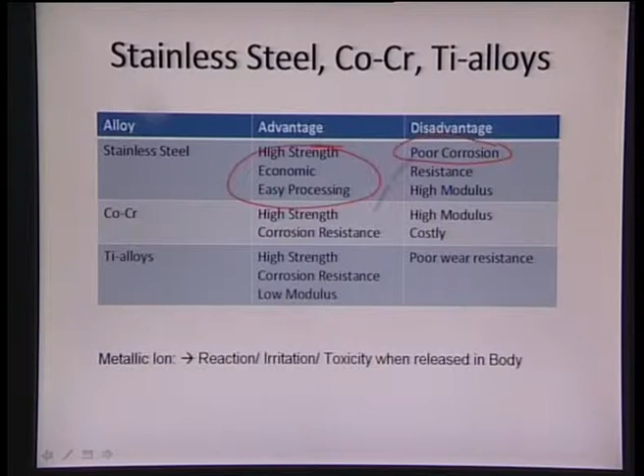As we realized earlier, stainless steel has high strength, is economic, and has easy processing, but the problem is it has very poor corrosion resistance. That's why we moved to cobalt chromium alloys, which have good strength and high corrosion resistance, but are very costly and still have high modulus. If a material has very high modulus, the bone will start thinking it doesn't need to be there, and it will start getting reabsorbed into the body.

So we want a material with a little lower modulus, and that is sufficed by titanium alloys. They provide a good combination of high strength, good corrosion resistance, and low modulus. But the only problem with titanium alloys is that they have very poor wear resistance.

To counteract the poor wear resistance, titanium alloys generally need some sort of surface coating, which takes care of the wear part and enhances the surface wear resistance of the titanium implant. We can also apply a coating that is much more biocompatible in nature, one that can assist bone integration onto its surface.

That coating can be more ceramic in nature, such as hydroxyapatite. Once the hydroxyapatite-based ceramic coating is applied onto the titanium implant, it can take care of the lower wear resistance of titanium and impart much superior wear properties. It can also provide a base for cells to grow, adhere, and proliferate on the implant surface.

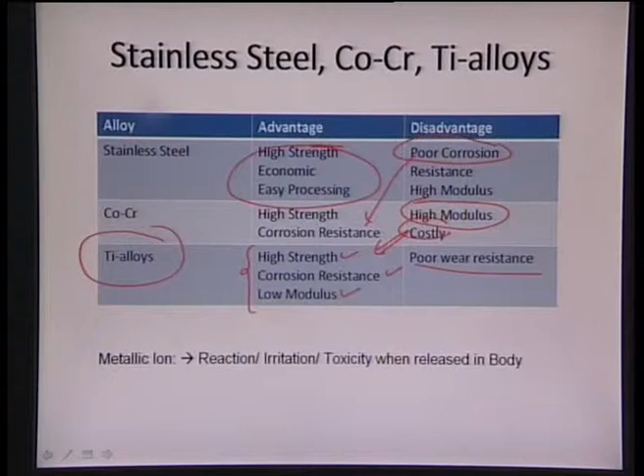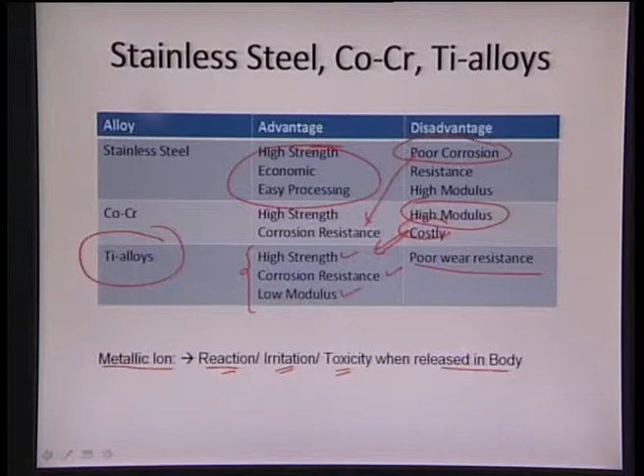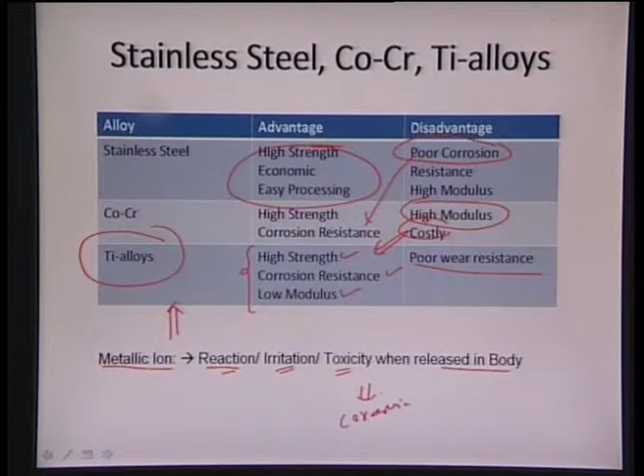There is one more problem with the titanium alloy Ti6Al4V: it has metallic ion concentration that can react, irritate, or induce toxicity when released into the body. To eliminate or reduce the effects of ion release, ceramic coatings again come for the rescue, acting as a barrier that doesn't allow ions to flow easily from the implant surface to the surrounding material.

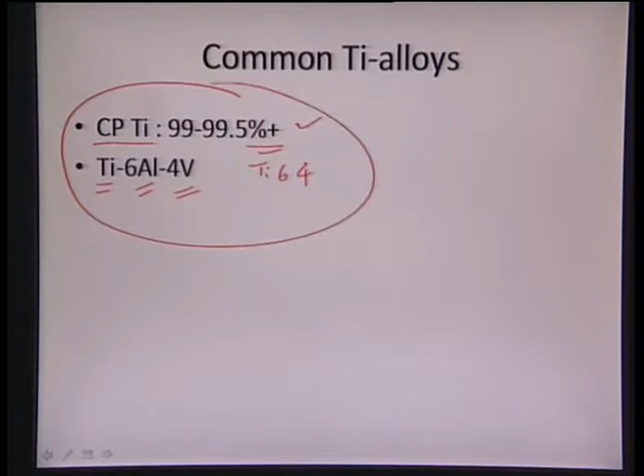There are two common titanium alloys predominant in the medical industry: commercially pure titanium, which is approximately 99% to 99.5% plus purity, widely utilized in the biomedical industry, and a combination of titanium with 6% aluminum and 4% vanadium, called Ti6Al4V, or Ti6-4 for short. These are the two most commonly used titanium alloys in the biomedical industry.

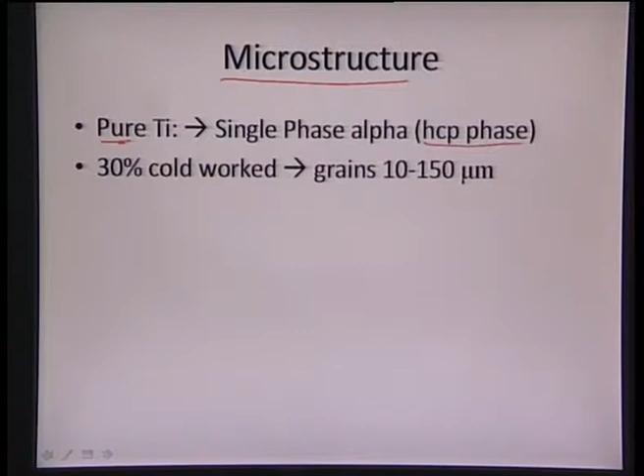Coming to the microstructure, pure titanium is basically a hexagonal HCP phase, called the alpha phase, so pure titanium appears more as a single phase material. Owing to the limited slip planes available in an HCP crystal, it has very limited processability, as it has a limited number of slip planes, making it generally difficult to process.

This titanium alloy is generally cold worked to achieve grains in the order of 10 to 150 micrometers in size. Ideally we can get a single phase structure in titanium alloy, and to induce much more strengthening, we go with cold working, approximately 30%, to achieve grains in the order of 10 to 150 micrometers in diameter.

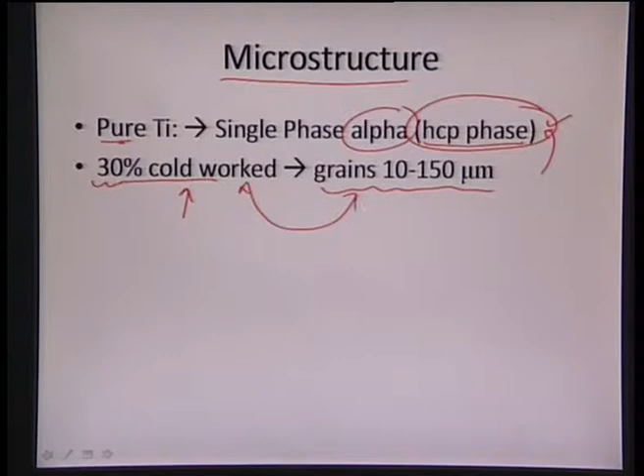There can be addition of secondary interstitials into the titanium, such as oxygen, nitrogen, or carbon, which go into the interstitial sites of titanium, giving various combinations. Certain grades differentiate the titanium alloy, from grade 1 to grade 4, depending on oxygen content. Oxygen can range from 0.1 to 0.4 weight%, nitrogen up to approximately 0.05% maximum, and carbon up to 0.08 weight% into the titanium alloy.

The function of all these interstitials is to achieve interstitial solid solution strengthening. So once carbon, oxygen, or nitrogen are in the interstitial sites, they induce solid solution strengthening of the titanium alloy.

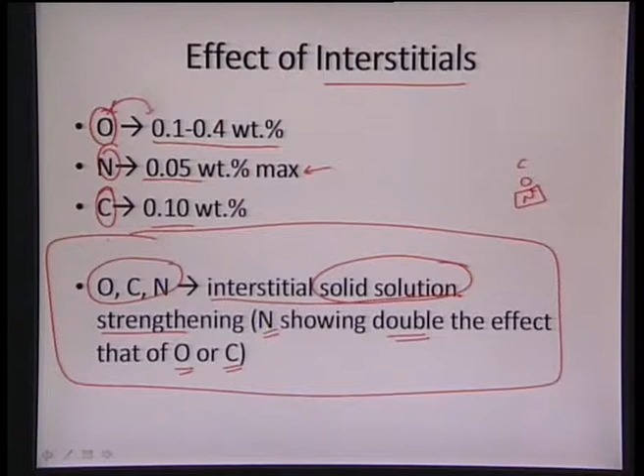Researchers have observed that nitrogen shows approximately double the effect of either oxygen or carbon. So if nitrogen sits in the interstitial, it provides much more strengthening effect compared to oxygen and carbon. But we can add a maximum nitrogen of around 0.05 weight%. This is the overall effect of interstitial oxygen, carbon and nitrogen sitting in interstitial sites, with nitrogen showing approximately double the effect of oxygen or carbon in providing interstitial solid solution strengthening.

Oxygen is also very predominant in enhancing mechanical properties. If we increase the oxygen content from 0.18 to 0.4%, the yield strength will increase dramatically from 170 to 485 MPa, approximately more than 2.5 times improvement just by doubling the oxygen content. So once we have titanium, inducing oxygen to a larger percentage will enhance the yield strength.

At the same time, if we increase the oxygen content from 0.085 to around 0.27 weight%, we will also see an increase in fatigue strength, from approximately 88 to 216. So if we increase the oxygen content to approximately double or triple, we see the same type of effect in the fatigue strength as well.

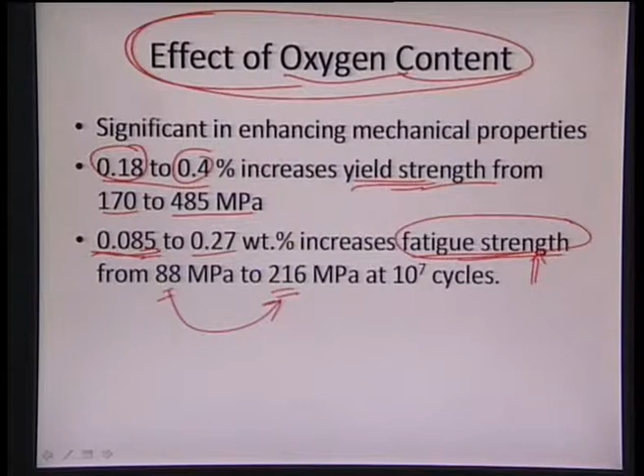So higher oxygen content is useful in terms of increasing the yield strength and also increasing the fatigue strength, because those sites act as high energy regimes, making it difficult for slip to occur, which provides an increase in the yield strength or fatigue strength of the titanium alloy.

The corrosion resistance in titanium alloy comes because of the presence of a titanium oxide layer. This titanium oxide layer acts as a barrier for the surface to interact with the titanium implant, and is responsible for rendering corrosion resistance to the titanium alloy.

At the same time, TiO2 is found to be much more biologically compatible even at the molecular or tissue level. Because of its similarity, it allows cells or tissues to grow on its surface without inducing any toxic effects, so tissues find a very friendly environment on the titanium oxide surface, because it is no more titanium.

Titanium is basically covered with an impervious layer of titanium oxide, so there is no release of titanium ions through it. Titanium oxide is much more bio-friendly and bio-inert in nature, and does not induce irritation or toxicity in cells or tissues, so they find a comfortable environment for adhesion, growth and proliferation.

So the advantage from the titanium oxide layer is that it imparts corrosion resistance even in severe body fluid environments, and it can also impart biological compatibility both at the molecular level as well as the tissue level.

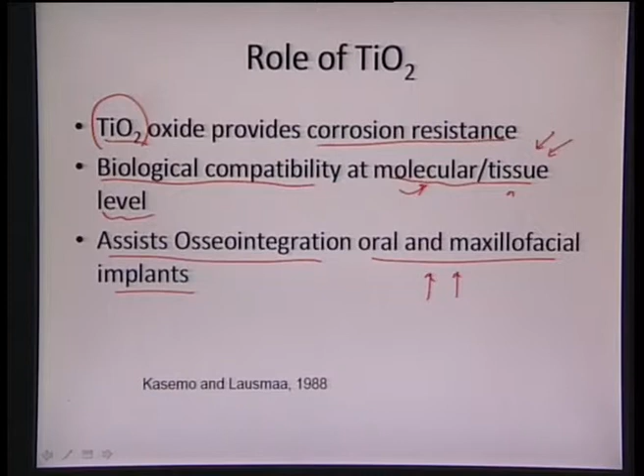Coming to titanium alloy, titanium itself is not very strong, so it needs reinforcement. Titanium is a single phase material, and if we make it dual phase instead of having only the alpha or HCP phase, by inducing a secondary phase we get strengthening from the secondary precipitate, because it impedes dislocation motion. It can also generate new slip systems available for slip to occur, enhancing ductility. So processing is enhanced, and strength is also enhanced because of the dual phase microstructure.

In the titanium alloy, we have titanium as base, generally called Titanium-6-Aluminum-4-Vanadium, with aluminum between 5.5 to 6.5% and vanadium between 3.5 to 4.5%. We also have secondary reinforcements such as iron, carbon, and oxygen, which also impart strengthening by increasing either the yield strength or the fatigue strength.

That part can also be achieved from interstitials such as carbon and oxygen, and we can also have some other reinforcements from iron, nickel and so on. Overall, this titanium alloy is also called titanium 6 aluminum 4 vanadium. It is a very popular material for biomedical implants, and it consists of aluminum around 6% and vanadium around 4%, with the rest being carbon, oxygen and so on.

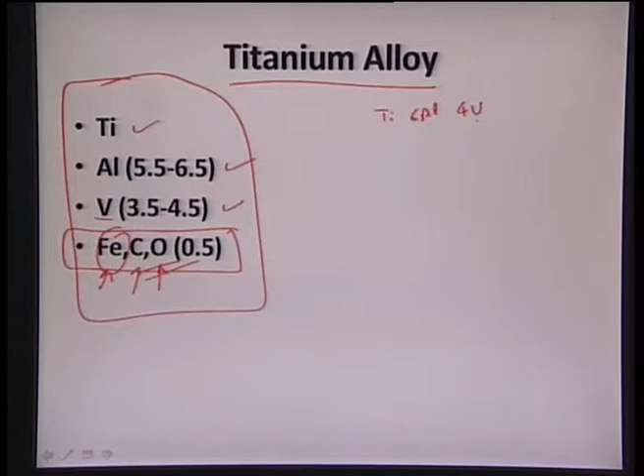As I said earlier, the role of these additions in titanium 6 aluminum 4 vanadium is that it forms a dual phase microstructure. Alpha comes basically from the titanium part, and at the same time alpha is also being stabilized by aluminum, so aluminum acts as an alpha stabilizer, rendering the HCP phase much more stable. But the presence of vanadium helps in forming a beta phase. So we see this titanium 6 aluminum 4 vanadium is a combination of alpha plus beta phase.

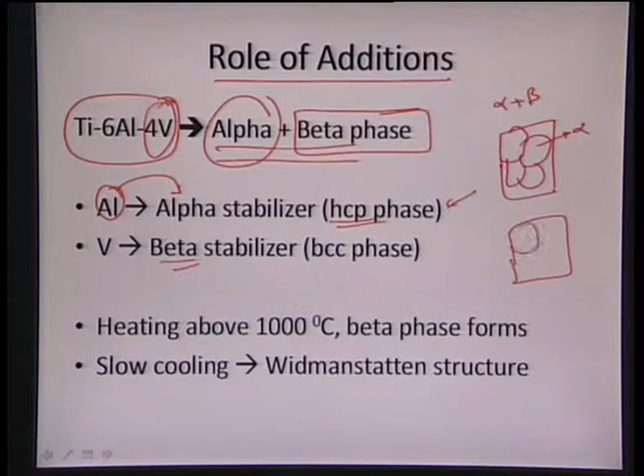Instead of having a single phase like in pure titanium, which was only alpha, in this case we have a dual microstructure. Some certain pockets are only beta, so we can see alpha plus beta regions. We see a dual phase microstructure, which assists us in achieving even higher strength and very high fatigue strength once we have this dual phase microstructure.

That is the advantage of inducing secondary alloying elements such as aluminum and vanadium, to impart much more increase in the yield strength and the fatigue strength of the titanium alloy itself.

One more thing that happens with titanium 6 aluminum 4 vanadium is that once we heat it above 1000 degrees centigrade, we see the formation of beta phase, because beta phase is stable at higher temperature. So once we go above 1000 degrees centigrade, we see a microstructure which is full of beta, 100% beta structure.

Once we start cooling it very slowly, the material is basically being retained at very high temperature for a very long time, and it cools down very slowly. So there is much more increase in the grain size. That is the problem with slower cooling, that we tend to see something called the Widmanstätten structure.

In the Widmanstätten structure, we basically have a structure like this, let me draw it here. Initially we have only beta grains once it is heated at higher temperature, greater than 1000 degrees centigrade, so we see completely 100% beta. As soon as we start cooling it down slowly, we see the grain size increase, and after a certain temperature below 1000 degrees centigrade, we see the nucleation of alpha phase as well. In this case, we see bigger beta grains which were stable above 1000 degrees centigrade, along with nucleation of alpha phase.

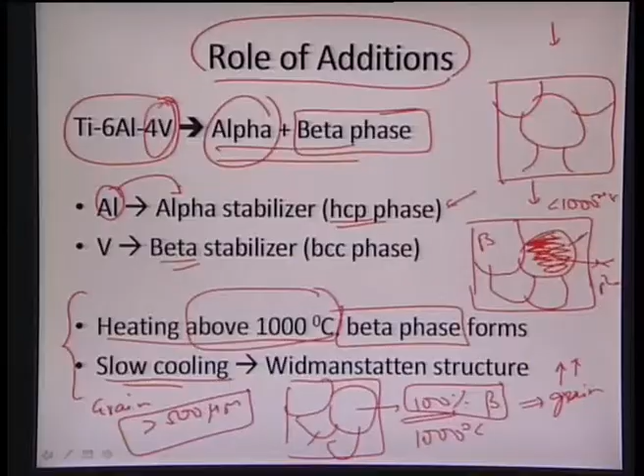So though this alloy has certain advantages from its additions, slow cooling induces some deleterious effects, and the grain sizes can basically be more than even 500 microns. At this grain size, the mechanical properties will be very inferior because of the Hall-Petch relationship, since our grain sizes are on the order of more than 500 microns.

So the overall mechanical properties, such as yield strength, will be very inferior. That is the overall negativity which can be induced just by processing itself, because in this case we are taking the material at very high temperature, more than 1000 degrees centigrade.

We are letting the beta stabilize, and then we are allowing the alpha phase to form an equilibration. We are doing a very slow cooling, and because of that the grain size has extended to a very huge extent, maybe up to more than 500 microns. This nucleation will cause the HCP phase to form, which is nothing but alpha, which is again more like a needle-like structure, and that is inducing this negative effect.

So we can see this Widmanstätten structure. It is basically the HCP alpha phase, which is aluminum rich, and when depleted in the vanadium part, it starts precipitating as a plate or needle.

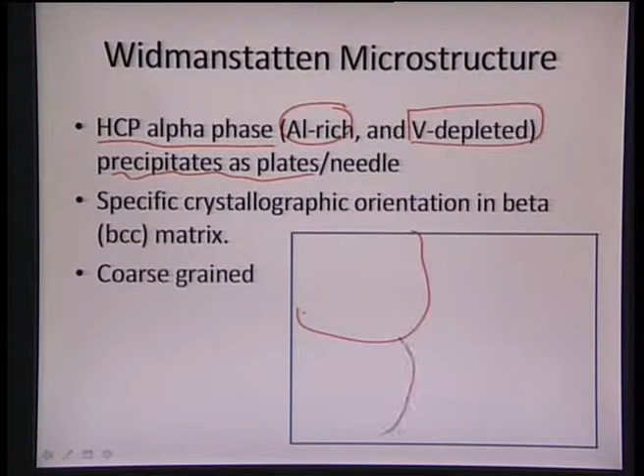So we see that we had grains like this for the beta, and then we see the nucleation of this alpha phase, which can start nucleating within this, and then we have this beta phase, and again we will see alpha phase nucleating, because alpha phase will be much more stable at less than 1000 degrees centigrade.

We will see more of the grains which are forming alpha now. So we will have much more regions which have started forming alpha, and the original beta regions which were present because we had taken the material above 1000 degrees centigrade. So this is the initial beta, and then we start seeing the formation of alpha structure, which is much more needle-like, and that induces specific crystallographic orientation in beta.

So this alpha is forming by precipitating in particular crystallographic orientation. That is the reason it comes more like a needle-like structure, and that is again forming within the beta grain. So we have alpha getting precipitated in certain directions of the beta phase.

So that's what is being observed out here, and it is again a coarse grained material because the material has stayed for the whole heat treatment for a couple of hours. That is the problem with this particular material. We are taking it to a very high temperature, letting it be there for much time, and then doing a very slow cooling.

That is the reason the material undergoes a higher thermal exposure for a very long time, and the grains remain very coarse. Again we see that the alpha is getting precipitated in the BCC type beta matrix along certain crystallographic orientations, and that is the reason it appears more like a needle-like structure. This needle-like structure can create very high stress concentration effects near the needle edges, and that is the reason it is a very poor structure.

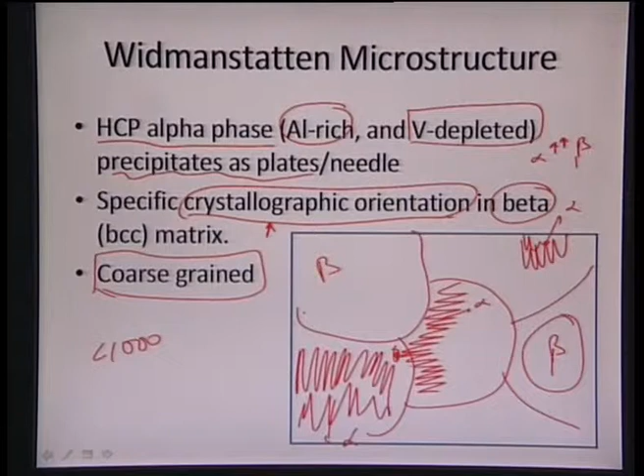So to avoid that, what can be done? We can do a rapid cooling, which basically induces martensitic or bainitic type solid state transformation, and since we have very rapid cooling, we can also achieve a very fine microstructure. So the advantage with this rapid cooling is that instead of a very coarse Widmanstätten structure, we are seeing a martensitic or bainitic type solid state transformation.

At the same time we are able to achieve a very fine microstructure, so we are not staying at the high temperature regime for very long time. Temperature is not high anymore, we are doing a very rapid cooling. So we go in excess of 1000 degrees centigrade, but we cool the material very rapidly, and that rapid cooling induces martensitic or bainitic type solid state transformation, and also induces a very fine microstructure.

The alloy is heated or cooled below the beta transition, so we are not letting this material go above 1000 degrees centigrade. We are letting this transition happen below 1000 degrees centigrade, so we are heating the material to less than 1000 degrees centigrade, and we don't allow the beta to form completely.

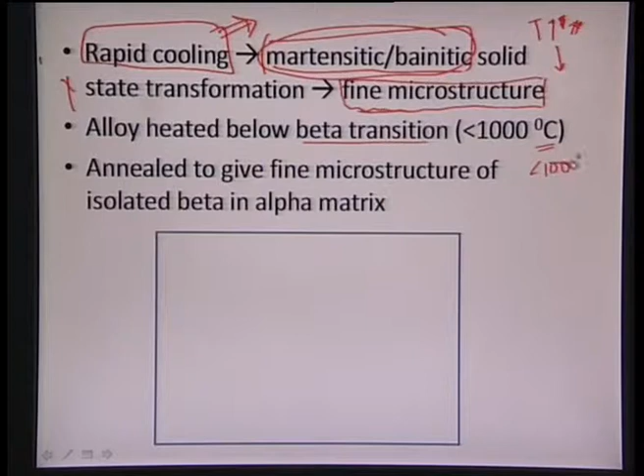Once beta is not formed completely, rapid cooling can induce martensitic or bainitic type transformation, and at the same time we are not allowing the grains to get coarsened. So grains remain fine and are retained as such. We are not letting the grains get coarsened because we are basically heating them much below 1000 degrees centigrade, and then they are annealed to give a very fine microstructure.

In this particular case, we have isolated beta in alpha matrix. That is what is happening now - we are not letting the beta form to a large extent. So we see very fine grains which can form, and these fine grains are of the order of around 10 to 20 microns. Instead of going up to more than 500 microns, they remain in the 10 to 20 micrometer regime.

Once we have this fine alpha regime, we have alpha grains, and we see that the beta is forming within it - here and there, but it is again scattered and very fine.

Fine, it means it is to the order of maybe 1 to 5 microns or so. So this alpha is very fine because the grains themselves are around 10 to 20 micrometers. The beta, which is basically nucleated at high temperature, is again very fine and scattered throughout. So we see a very homogeneous structure.

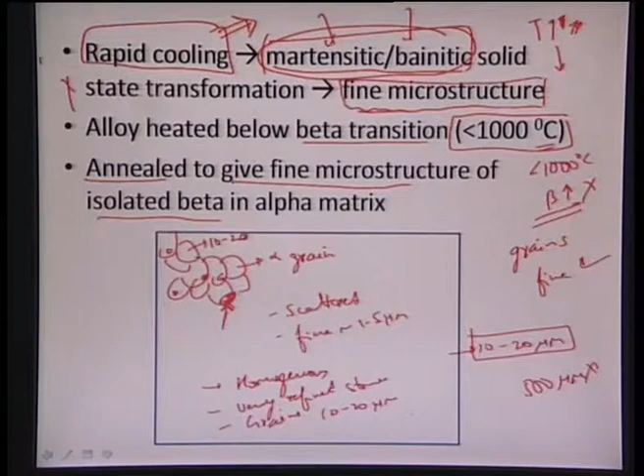Homogeneous, again very fine or very refined structure, and grains are to the order of 10 to 20 micrometers in diameter. So these are the certain advantages we are getting here, that we are letting the material heat, but not above 1000 degrees centigrade. We keep the material lower than 1000 degrees centigrade, and then we do annealing or rapid cooling, and rapid cooling is basically retaining those fine alpha grains, and we see some precipitation of beta grains within the alpha grains.

So we have alpha grains now in the order of 10 to 20 micrometers, and beta is getting precipitated here and there, and again the size of beta precipitated is a couple of microns. So overall what we get is a very uniform structure, a very nicely dispersed beta in the alpha matrix, and now we don't have any segregation or Widmanstätten structure anymore, and the grains themselves have now limited size of around 10 to 20 micrometers. So overall properties grow multifold because of absence of this negative structure such as the Widmanstätten structure or the coarse grain.

So the fine grained materials also now induce this Hall-Petch relationship. Because of the Hall-Petch relationship, we can get much superior mechanical properties, which are stated in the earlier lecture. But one thing is basically seen is that for titanium alloys, the Young's modulus doesn't change much even with certain additions.

For a commercially pure titanium, which is cold worked to around 30%, we see yield strength to the order of around 485, tensile strength of around 760 MPa, and it has a fatigue endurance limit of around 300. But as soon as we start adding certain alloys to it, like in case of titanium 6 aluminum 4 vanadium, and that material is forged, annealed and heat treated...

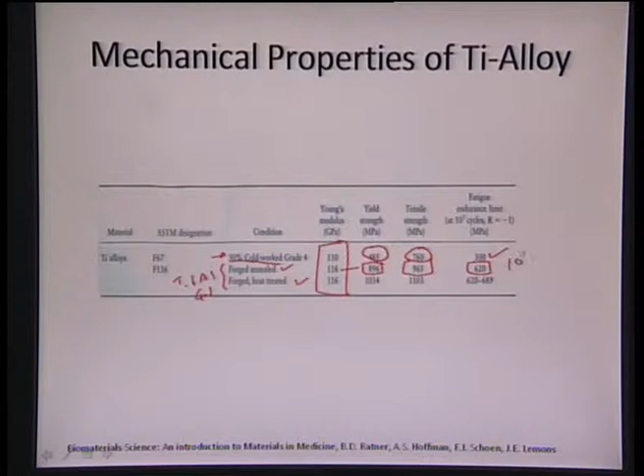Again, controlled heat treating can increase its yield strength to around 1034 megapascals, which is more than a gigapascal. Tensile strength is also increased by a certain extent, around 1.1 gigapascals, and fatigue strength is also increased to a certain extent. So we can see how the role of heat treatment can be utilized in this particular processing of titanium alloy to achieve enhanced mechanical properties.

So that is the way in which we can manipulate the properties of titanium alloy via certain secondary additions, as well as by performing some heat treatment. So those are the advantages of utilizing titanium alloy and performing heat treatment, because we can achieve very superior yield strength, tensile strength and fatigue strength. Though the Young's modulus remains approximately similar and does not change much, the enhancement in yield strength, tensile strength and fatigue strength is just phenomenal.

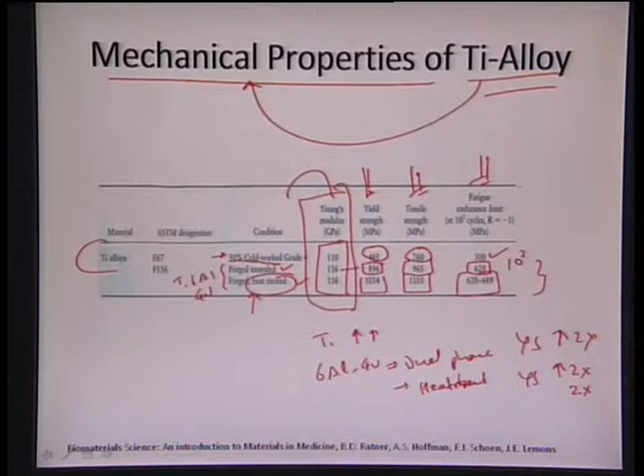Again, titanium alloy, as we learnt earlier, has very poor wear resistance. At the same time, if we want a very superior fatigue property, it is basically the implant which takes the load and undergoes much more wear and tear in terms of taking the impact, in terms of taking the fatigue, because ceramics are very brittle in nature, so they cannot take much of the load or the fatigue. They don't have good fatigue property because they don't have enough yielding which can happen in the material. So we see that the fatigue property is much more dependent on the titanium alloy.

So we can see that fatigue property is more dependent on the implant, or the titanium alloy which forms the implant. To improve the fatigue property, it is only the titanium alloy which is responsible. So we need to perform certain heat treatments, as we saw earlier - controlled heat treatment. We have to take the material below 1000 degrees centigrade and do the heat treatment, so that the yield strength and fatigue strength increase to a large extent in comparison to titanium itself.

If you are utilizing commercially pure titanium, it might have fatigue strength of around 300 megapascals at 10 power 7 cycles. But if you take a titanium alloy and properly heat treat it, it can have up to 600-700 MPa for the same life cycles. This tells us that we have to utilize a superior grade of titanium if we want to achieve enhanced fatigue properties, because that is mostly dependent on the implant, since the implant is the one which has to take the overall load.

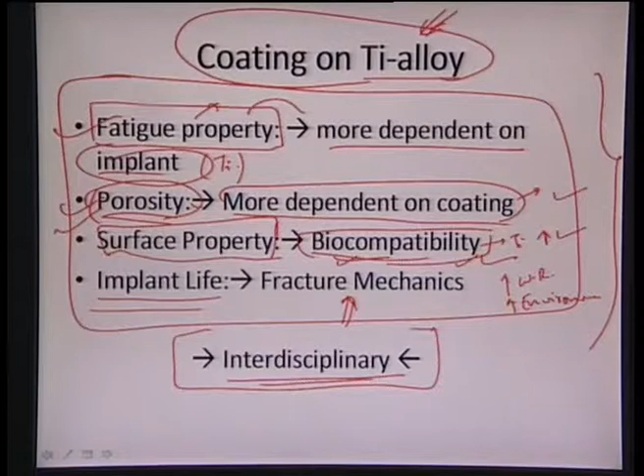Coming to the compatibility part, whether it is viable in terms of whether cells can really cling on to it, seeing about its biocompatibility, and seeing about the mechanical part, whether the fracture will occur prolonged or very shortly. So all those parts make this particular study interdisciplinary in nature, and that's what makes it much more complicated.

Now coming to the wear of implants. Seeing that it is multidisciplinary in nature, wear is also one of the very essential components of designing an implant, because any two joints which are lying nearby will tend to wear out with time, since if there is some movement between the two, the material will undergo some sort of wear.

Like we have acetabular cups, we have a ball and socket joint. In that we can see an overlay between a metallic surface and a polymeric or ceramic surface. So once we have two dissimilar metals which are closer to one another, there will definitely be some wear onto that particular interface.

Wear of metallic implants is one of the very serious concerns, because once it starts releasing some debris while getting abraded or worn out, those ions will start getting released into the body. This wear will occur at different joints of the human body, and once implanted, there is hardly any control. All the debris which is generated will try to accumulate somewhere, and that is just released into the blood. We don't have any control after that.

So we need to have a material with very superior wear resistance once implanted into the body. We need to see that wherever two similar or dissimilar metals are coming in contact, we design it so nicely that we can either reduce or increase the corrosion resistance, or reduce or enhance the wear resistance of those particular implants.

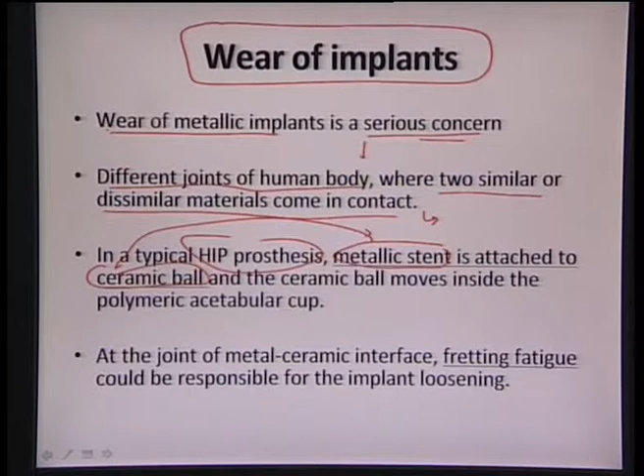Like in a typical hip prosthesis, a metallic stent is attached to a ceramic ball. Because of the interface between the ceramic ball and the metallic stent, there is some relative movement between the ceramic ball and either the polymeric acetabular cup, or a ball made of material like stainless steel or titanium, with a polymeric liner or ceramic liner over it.

Basically between the metallic and ceramic interface, we can see much more fretting wear. That fretting wear can easily cause some loosening of the implant. So if there is wear happening between the interfaces, between metal and ceramic interface, that will tend to increase the gap between the two.

Once there is some debris released, or some gap generated, it will lead to loosening of the implant, and we'll need a resurgery to insert the implant back into the body, basically doing one more surgery. That particular material has failed because of poor wear resistance. So that is a highly essential, highly critical part in terms of increasing its mechanical property and improving its wear resistance.

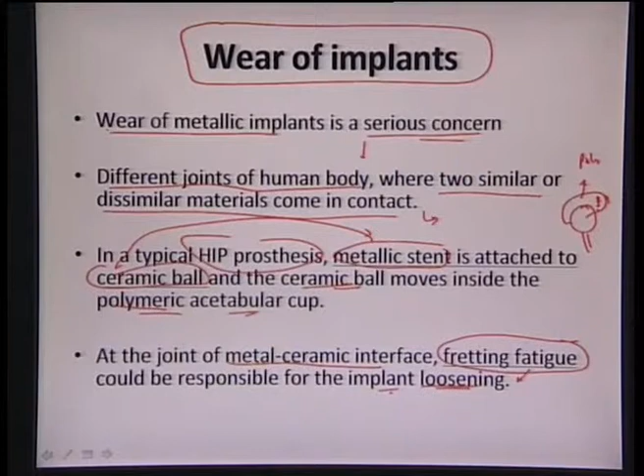Coming back to one more important property of this titanium alloy: its corrosion resistance. Corrosion of titanium alloys is also one of the very critical parts, because generally we utilize titanium alloy which tends to be good corrosion resistant due to the formation of a TiO2 layer on its surface.

A group led by Spriano characterized a sample of titanium 6 aluminum 7 niobium alloy with surfaces presenting different chemical and mechanical states, and from that they found that titanium 6 aluminum 7 niobium presents bioactive ability and good corrosion resistance only after an appropriate surface treatment.

Only when surface treatment is so nicely given, in terms of improved corrosion resistance, a good biocompatible surface, enough porosity, proper wear resistance, and at the same time more biocompatibility, can it take on the overall aspect of compatibility as an implant. It basically consists of two steps: first chemical etching, then heat treatment. It needs some chemical treatment plus heat treatment so it can attain superior yield strength and superior tensile strength.

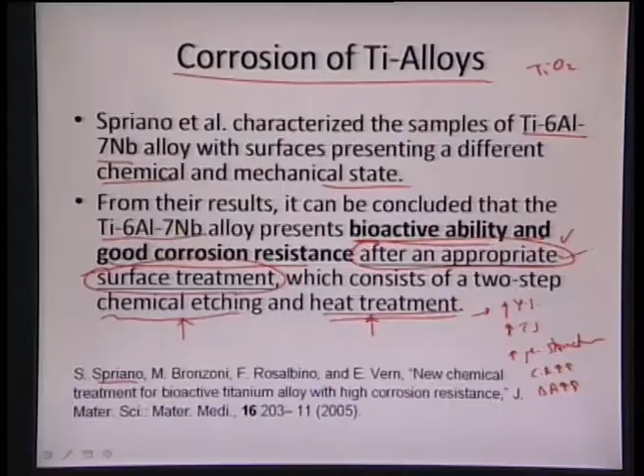At the same time, it can achieve a good microstructure, so that the overall corrosion resistance is improved and overall bioactivity is also improved. That is what the overall study carried out by Spriano showed, that only after an appropriate surface treatment is given. Why? Because surface treatment is so important, because surface is what comes in contact with the material. Once an implant is inserted into the body, it is only the surface which comes in direct contact with the surrounding tissue. So it needs to be very compatible with the surrounding in terms of imparting good corrosion resistance, and in terms of letting the cells stick onto itself, grow and proliferate to form certain networks. That is what the overall study carried out by Spriano demonstrated.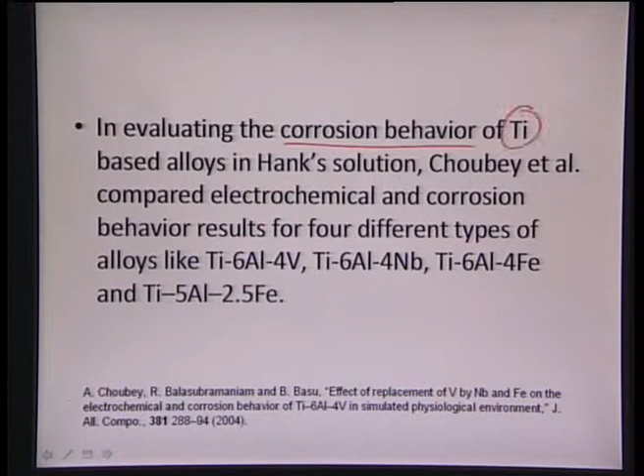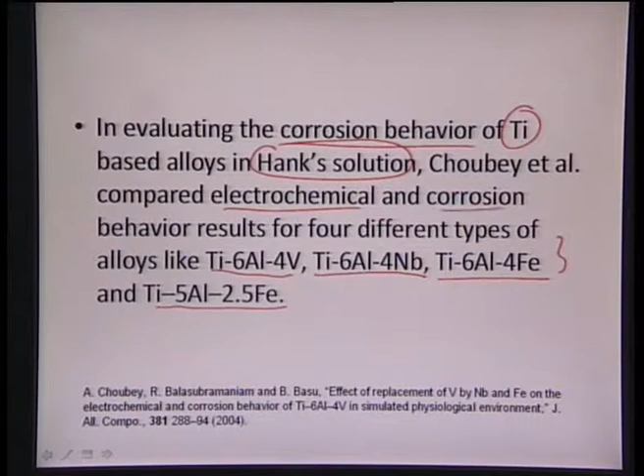There's one more group, Choubey, which studied the corrosion behavior of titanium based alloys. They took a couple of alloys such as titanium 6 aluminum 4 vanadium, titanium 6 aluminum 4 niobium, titanium 6 aluminum 4 iron, and titanium 5 aluminum 2.5 iron. They found the behavior of these four different types of alloys in Hanks solution, and then compared the electrochemical and corrosion behavior of all these alloys under different conditions.

At the same time, they also performed fretting wear testing of the titanium based alloys. The fretting wear was done using a 10 Newton load at 10 hertz, for a displacement distance of around 80 microns, going up to around 10,000 cycles, all under simulated body fluid environment. They found that the coefficient of friction for titanium 6 aluminum 4 vanadium lies between 0.46 to 0.5, whereas that of titanium 5 aluminum 2.5 iron falls within around 0.3.

They found that the major wear mechanism involved three steps: tribomechanical abrasion, transfer layer formation, and finally cracking.

It also shows that the coefficient of friction is very high for commercially pure titanium, around 0.5, whereas it decreases marginally for titanium 6 aluminum 4 vanadium, showing a variance from 0.46 to around 0.5. Titanium 13 niobium 13 zirconium showed around 0.48, whereas titanium 5 aluminum 2.5 iron showed around 0.3, and cobalt 28 chromium 6 molybdenum showed around 0.4 coefficient of friction.

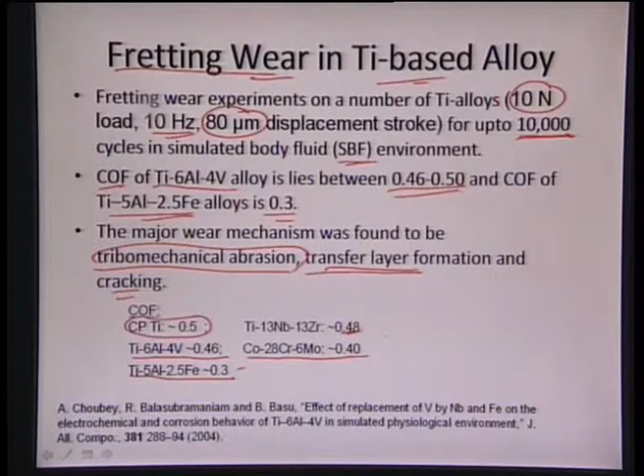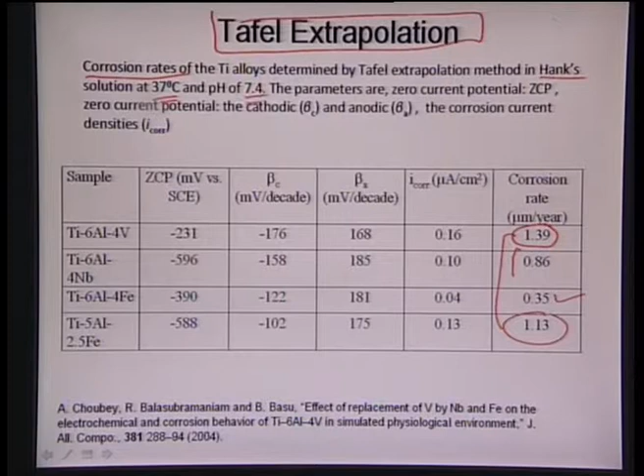From the Tafel extrapolation, corrosion rates were determined for the titanium alloys, and we can see the corrosion rates in micrometers per year are approximately similar in nature, whereas titanium 6 aluminum 4 vanadium showed the highest rate, with others comparable. These were done again in Hanks solution at 37 degrees centigrade at a pH of 7.4, and parameters like zero current potential, cathodic and anodic current potentials, and corrosion current are given. The corrosion current was very high for titanium 6 aluminum 4 vanadium, marginally followed by titanium 5 aluminum 2.5 iron, and least for titanium 6 aluminum 4 iron.

Again, the passive regime in materials exhibits a stable passive behavior between the zero current potential and the breakdown potential. Between this regime they show a much more passive region, and we saw that the addition of aluminum basically decreases the passive range, as seen in titanium 6 aluminum 4 vanadium and titanium 15 aluminum.

The niobium addition increased the passivation range, but not as much as that of titanium 6 aluminum 4 vanadium. Again, all the corrosion rates for all these materials...

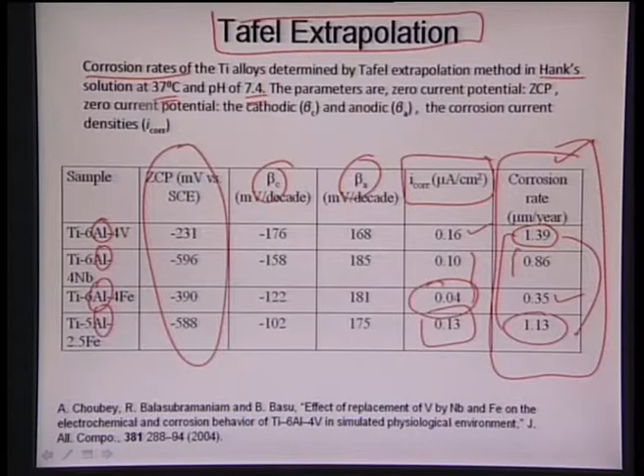So that is the role of aluminum: it is basically deteriorating the passive regime, whereas niobium tends to increase the passivation regime, as we can see once we start adding niobium, we see much more difference between the two regimes.

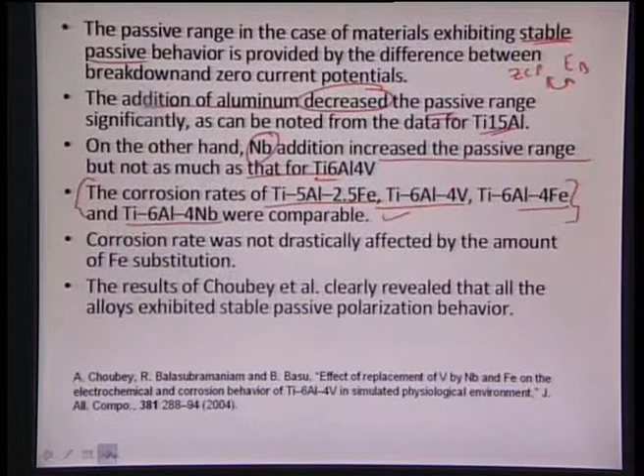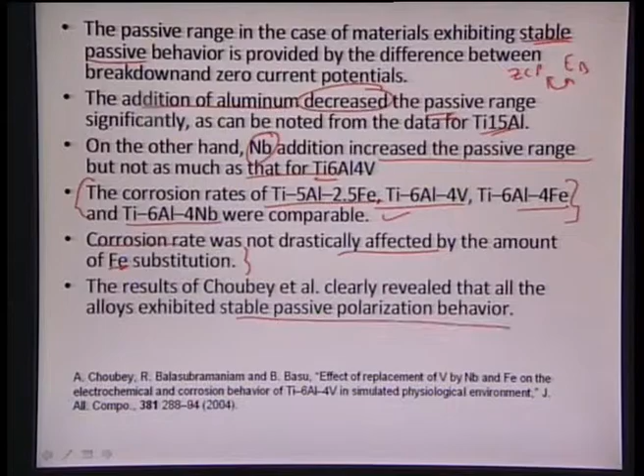Overall, we see that the corrosion rates are not so different for all these materials, even when adding certain iron to it, and they also clearly reveal that the stable passive polarization behavior exists between zero current potential and the breakdown potential. So coming back to the titanium alloy, the overall gist of it...

Titanium alloys are mostly HCP in nature, and we tend to add alloying elements such as aluminum, which is an HCP stabilizer or alpha phase stabilizer, and vanadium, which is a beta phase stabilizer or BCC stabilizer. There are two ways we can synthesize this particular material.

We can heat it above 1000 degrees centigrade and let the material cool slowly, but that tends to form very huge grains, or they tend to precipitate alpha in the beta grains, and beta grains are very coarse in nature, and from that we can get a Widmanstatten structure.

But since the grains have grown to a large extent, and we are getting a very needle-like structure, this overall microstructure doesn't appear good, and it generally shows very poor strength.

To avoid that, we take the material to less than 1000 degrees centigrade and let the alpha dominate in this regime, then we see certain nucleation of this beta precipitate, which is again BCC in nature. We see a very fine grained structure with very nicely dispersed beta in it.

That essentially gives a two-phase microstructure, very fine, 10 to 20 microns, with beta of around 1 to 5 microns in size. That gives a very uniformly dispersed microstructure, superior in its mechanical properties in terms of yield strength and fatigue strength.

So we can see that heat treatment is a very essential or key component in terms of altering the mechanical properties. We can increase the fatigue strength by approximately 2 times once we do a controlled heat treatment to the material.